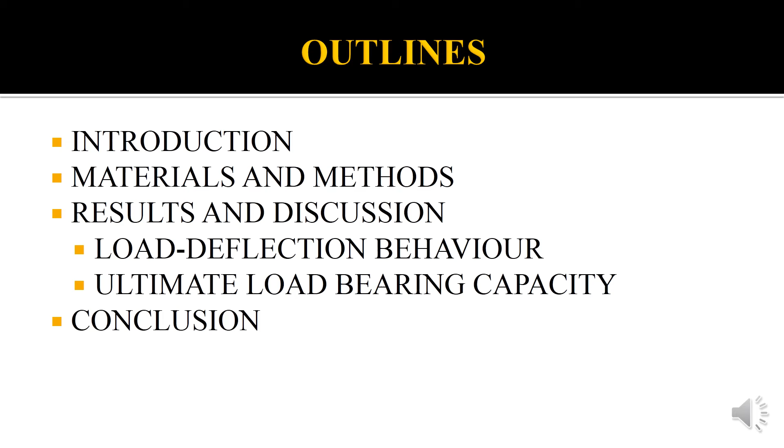By using waste paper, the cement amount used is reduced, providing an environmentally friendly construction material, as stated by Yun et al. 2007. It should be noted that papercrete has a limited range concept, as stated by Fuller et al. 2006. A paper reinforced structure is a structurally and economically viable alternative based on the indicated result within a range of size, as stated by Titzman 2006.

They identified their discovery of adobe and fibrous cement and found themselves independently, as stated by the Free Encyclopedia. Due to the alternative building material known as papercrete, the dead load of the main structure can be diminished, as stated by Gunarto et al. 2008.

The paper mill publishes most of the paper recycling works, as stated by Bai et al. 2003, Chin et al. 1998, Chun et al. 2006, Gallardo et al. 2006, Kraus et al. 2003, Naik et al. 2004, or to manufacture cement board, as stated by Fuwape et al. 2007 and Okino et al. 2000.

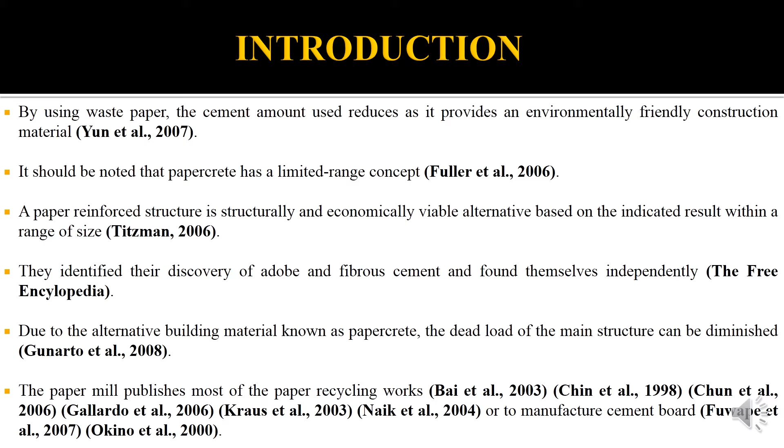Other than that, it can end up a reasonable and productive substitute in landfills, incinerators or other utilized choices, as stated by Shukeri and Naser 2008.

Moreover, waste paper can be used in a right way by using it in construction materials to reduce its density, as stated by Yogesh et al.

2017. The building expenses can be reduced by studying on measuring the quality, workability and other properties of papercrete, as stated by Titzman 2006. Moreover, usage of papercrete will decrease the dead load of the structure, the depth of foundation required, and also the percentage of steel used, so the labor amount and energy expense will decrease significantly, as stated by Yogesh and Varma 2016.

In addition, papercrete persuades waste paper recycling, particularly in a community without recycling activity. It cuts the waste space, holds paper production and chemical printing out of the water table, as stated by Malthy and Jegatheeswaran 2011.

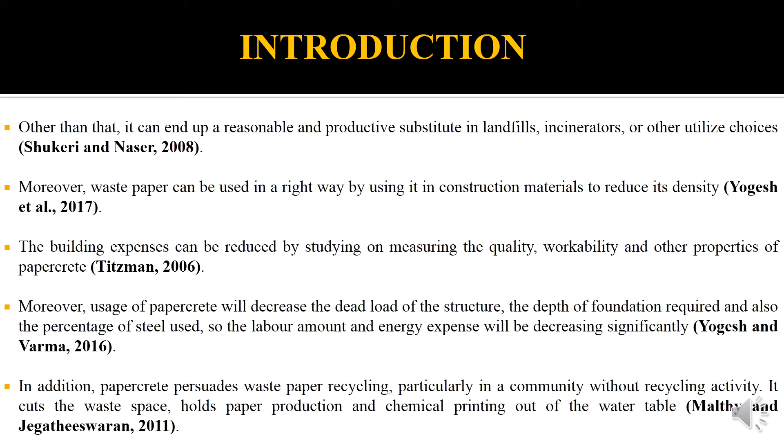These are the materials used in this research, such as cement, sand, aggregate, reinforcing bar, and water. Two types of shredded waste paper are used in this research: shredded copier waste paper (SCPWP) and shredded cardboard waste paper (SCBWP).

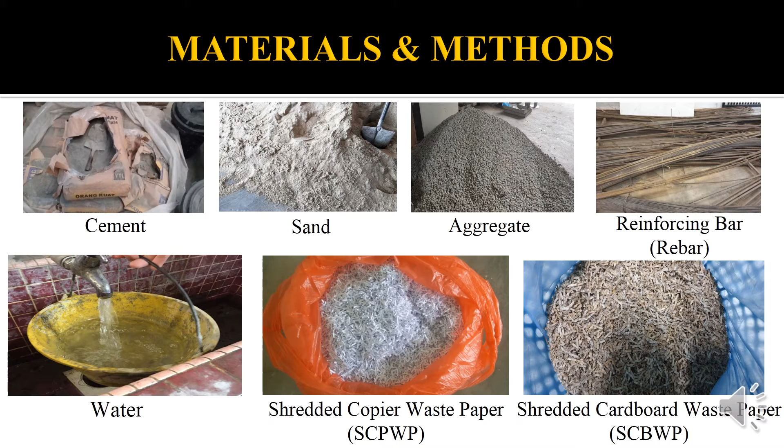Figure 1 shows the paper chemical structure, the hydrogen bond of cellulose. Paper is primarily made of wood cellulose fiber. A sugar type, beta-D-glucose, is the bonding of the cellulose chain. The polar OH cellulose bristles make up many hydrogen bonds with OH groups on approaching and bundling together the chains, as shown in figure 1, as stated by Prasad et al. 2015, Iqbal et al. 2017 and Harith et al.

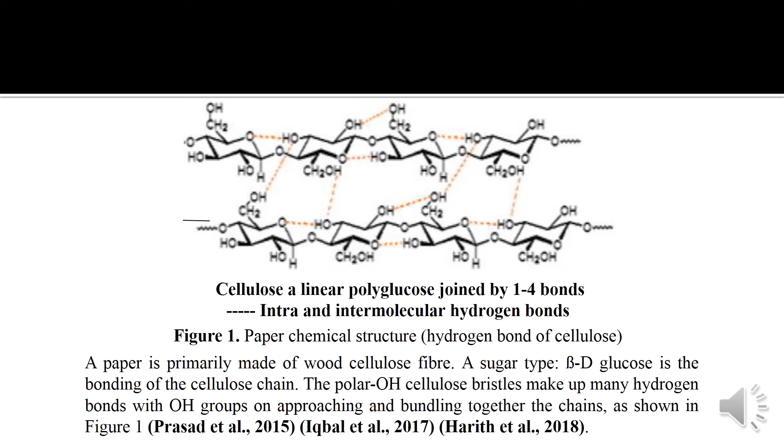2018. Table 1 shows the fiber properties after disintegration, as stated by Piotr et al. 2007. From the table, we can see that the cardboard waste paper has higher fiber average length, and medium and long fiber contents than copier waste paper.

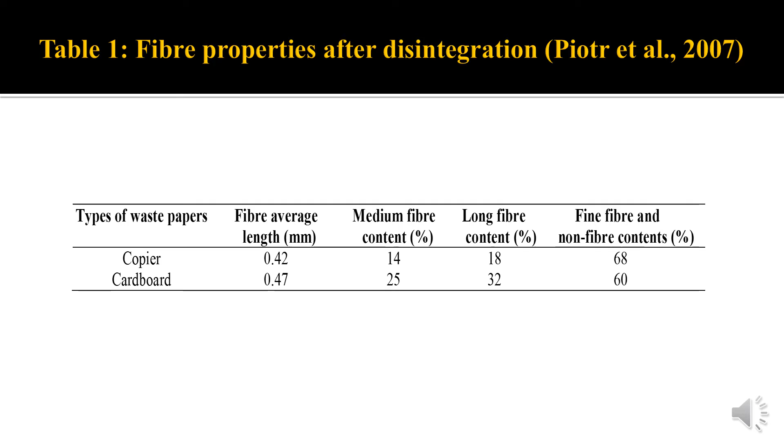Table 2 shows the strength properties after disintegration, as stated by Piotr et al. 2007. From the table, we can see that the bending strength, internal bond and modulus of elasticity increase at 5% and 10% copier waste paper and cardboard waste paper, while at 15% all the strengths start to drop compared to 0% copier waste paper and cardboard waste paper.

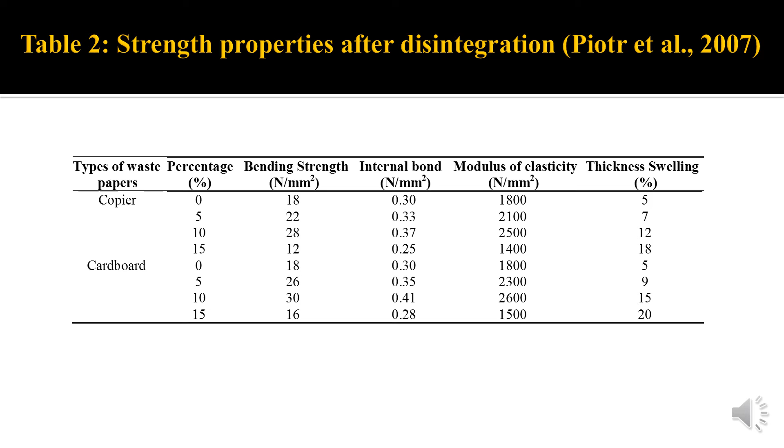The higher the percentage of copier waste paper and cardboard waste paper, the higher the thickness swelling. All strengths and thickness swelling of cardboard waste paper are higher than copier waste paper.

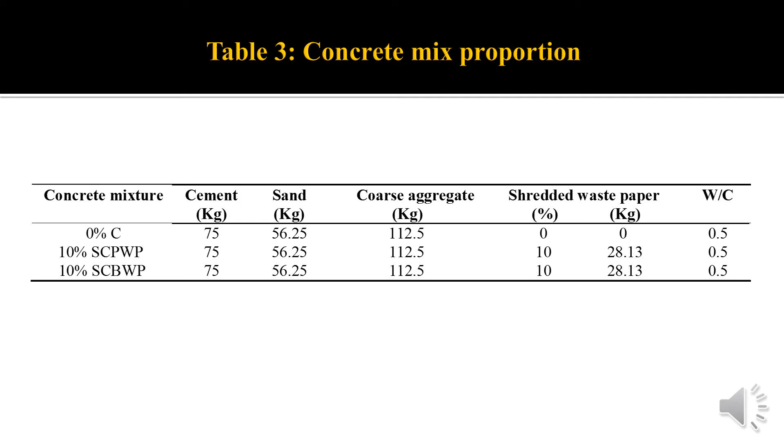This experiment uses a concrete mix proportion as presented in table 3. This mix proportion consists of three concrete mixtures: 0% for control, 10% shredded copier waste paper, and 10% shredded cardboard waste paper.

Shredded copier waste paper and shredded cardboard waste paper used as additions in concrete with 10% by weight of the mixture. There are three concrete mixtures used in this research: 0% C, 10% shredded copier waste paper, and 10% shredded cardboard waste paper.

The cement sand aggregate ratio used in this research is 1:0.75:1.5 by weight of the materials, and 0.5 is the water to cement ratio used. This ratio is fixed for all specimens.

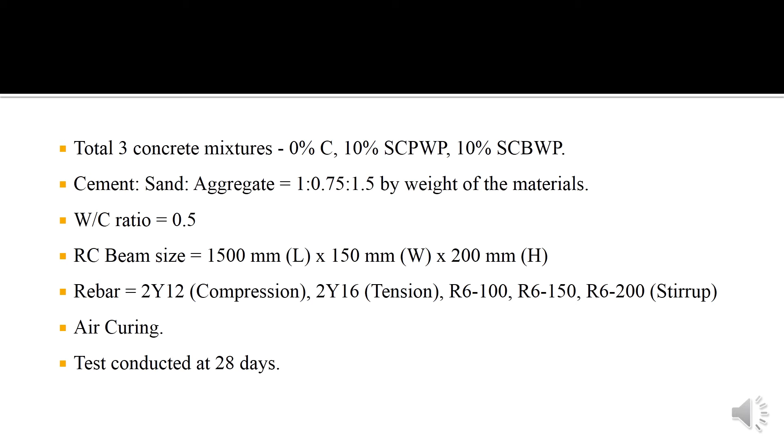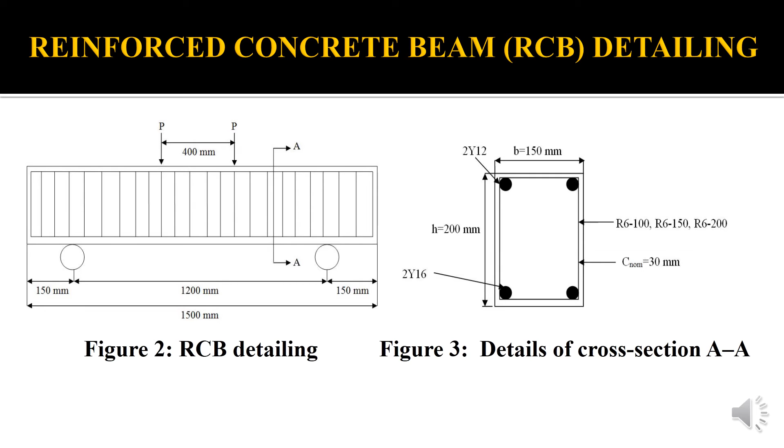The test conducted was a 4-point flexural test. The linear variable differential transformer (LVDT) was connected to the lower surface of the reinforced concrete beam to determine the load deflection and ultimate load bearing capacity values.

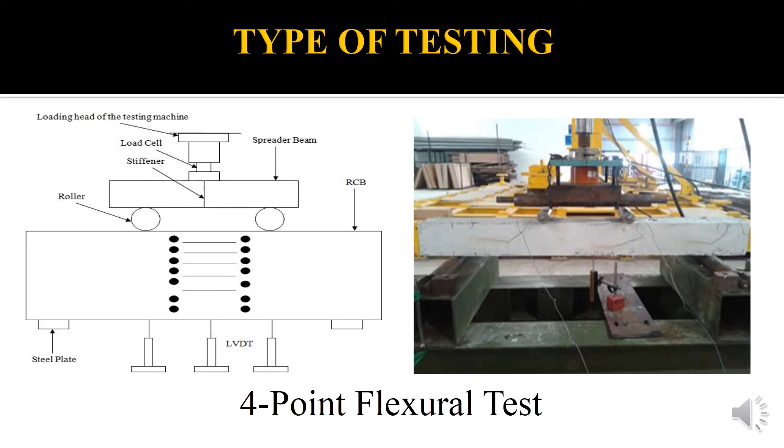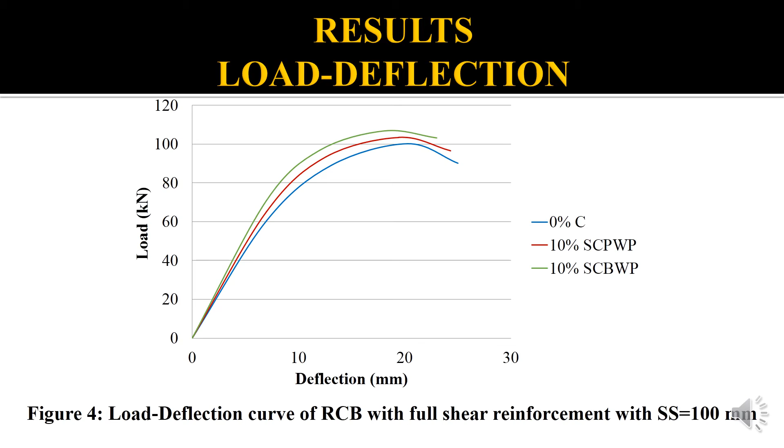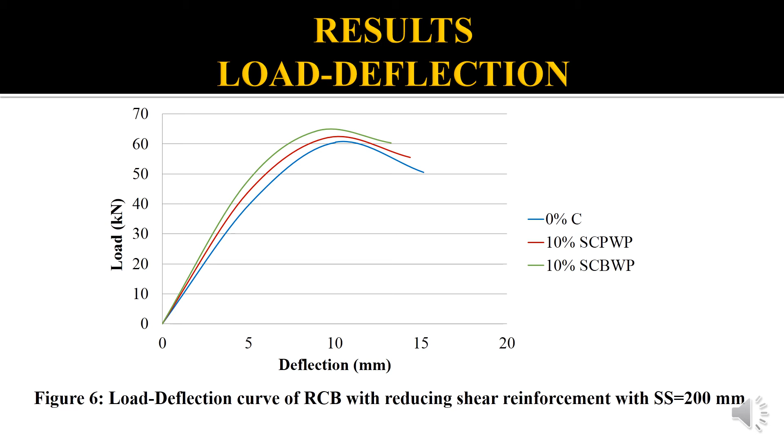Figure 6 shows the load deflection curve of reinforced concrete beam with reducing shear reinforcement with stirrup spacing 200 mm. 10% shredded cardboard waste paper records the highest load and lowest deflection compared to 10% shredded copier waste paper and 0% C concrete mixtures. This is the discussion.

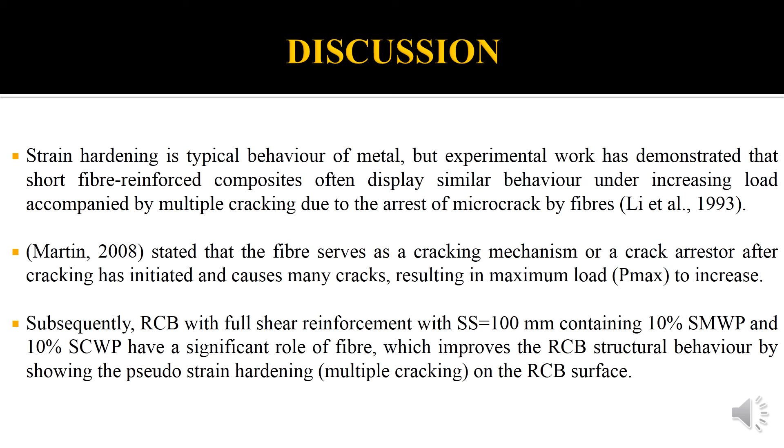Subsequently, reinforced concrete beam with full shear reinforcement with stirrup spacing 100 mm containing 10% shredded copier waste paper and 10% shredded cardboard waste paper have a significant role of fiber, which improves the reinforced concrete beam structural behavior by showing the pseudo-strain hardening, multiple cracking on the reinforced concrete beam surface.

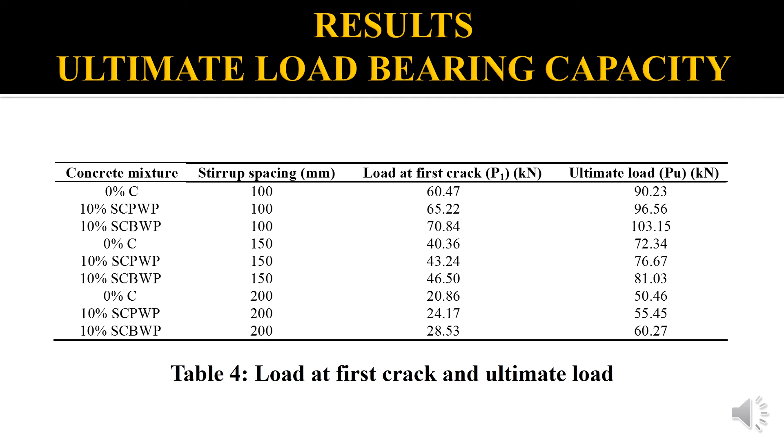Table 4 shows the load at first crack and ultimate load. From the table, 10% shredded cardboard waste paper with stirrup spacing 100 mm records the highest load at first crack and ultimate load values. This is the discussion.

If reinforced concrete exhibits many cracks and ultimate concrete strength is higher than P1, it may demonstrate pseudo-strain hardening or pseudo-ductility during increasing tensile load, as stated by Jiang 2003.

Martin 2008 said that fibers control the shear cracks, the mechanism of aggregate interlock, and improve the reinforced concrete beam dowel movement. Furthermore, most other cracks have been found in the 10% shredded copier waste paper and 10% shredded cardboard waste paper reinforced concrete beam in a small size, decreasing the crack width and increasing the number of cracks by the inclusion of fiber.

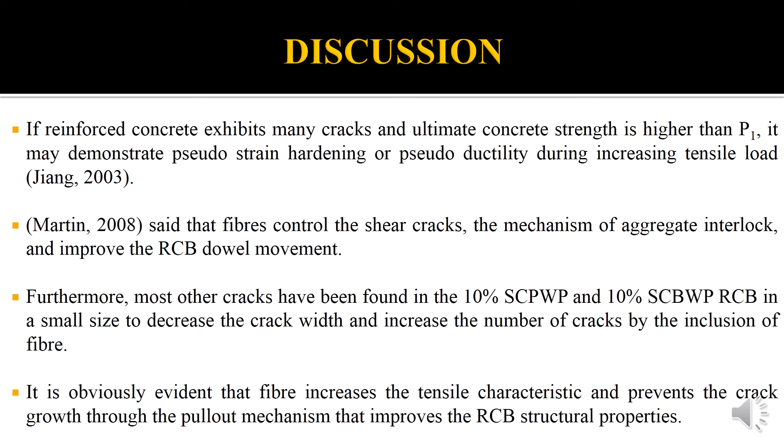It is obviously evident that fiber increases the tensile characteristic and prevents the crack growth through the pull-out mechanism, which improves the reinforced concrete beam structural properties. The last one is conclusion.

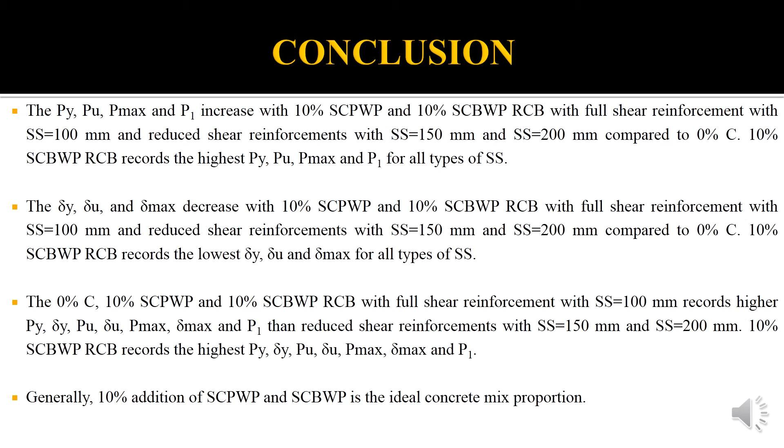10% shredded cardboard waste paper reinforced concrete beam records the highest Py, δy, Pu, δu, Pmax, δmax and P1. Generally, 10% addition of shredded copier waste paper and shredded cardboard waste paper is the ideal concrete mix proportion. That's all from me, thank you very much.